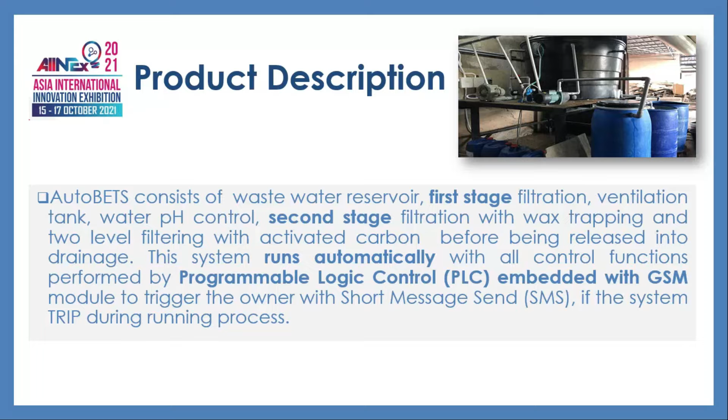Before being released into drainage, this system runs automatically with all control functions performed by the PLC embedded with a GSM module to trigger the owner with SMS if the system trips during the running process. As we can see on the upper right side, that's the overview of the system already installed at Northern Batik.

Okay, the preamble about this product. How did we start? One of the best known textile industries in Malaysia is the batik industry, as we all know. The industry widely expanded when batik was considered a national art form. This is also an important source of employment and locally generated income and revenue.

This industry is usually operated in small scale by workshops and factories throughout the country, especially in Terengganu and Kelantan, without a well-monitored waste disposal system. But in batik creation it is still quite incomplete and unsuitable because of the large amount of waste discharge that causes global warming. Imagine when batik becomes one of the important commodities in Malaysia. Batik was recognized globally, but we fail to take care of our own environment.

Because of that, automation of water treatment plants including in the Batik industry has already been developed and widely used in Malaysia. Majority of them, especially in small and medium scale Batik, are still using the manual automation system, conventional method. Unfortunately, using a manual automation system is time consuming, especially when human supervision is required during a long cycle of treating Batik effluent. Plus, there's the safety of the worker to manage and deal with the acid. This is a safety issue and hazard.

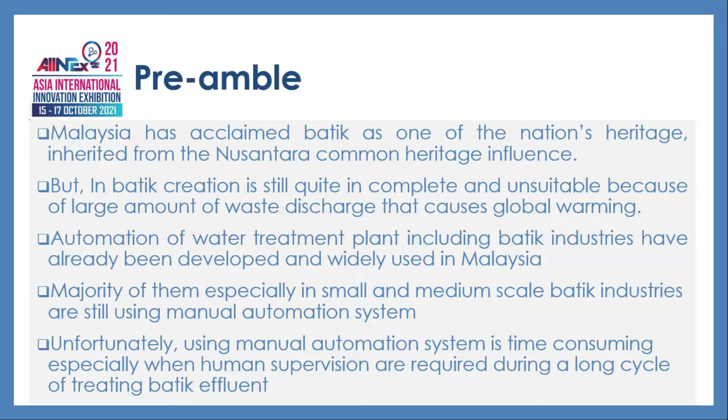Okay, moving on to the problem statement, this is the issue related with this innovation. Today, a large proportion of environmental issues in the Batik industry are related to the use and discharge of water, which includes residual dye stuff, toxicity, color waste, heavy metal contamination, and other environmental issues. This is the first issue, wastewater. Wastewater generates a huge amount of hazardous wastewater.

And the second issue is about the duration. The duration for one cycle of the system to treat the Batik liquid effluent and waste discharge is approximately 4 hours minimum. Apart from that, Kraftangan Malaysia, for example, has produced a system called SREB as treatment for large amounts of waste discharge water in the Batik industry.

But the system operates manually and needs one or more persons in charge to operate it. The duration for one cycle of the system using the manual and conventional method to treat the Batik liquid effluent and wastewater discharge is approximately 4 hours. 4 hours - it's an issue about the duration.

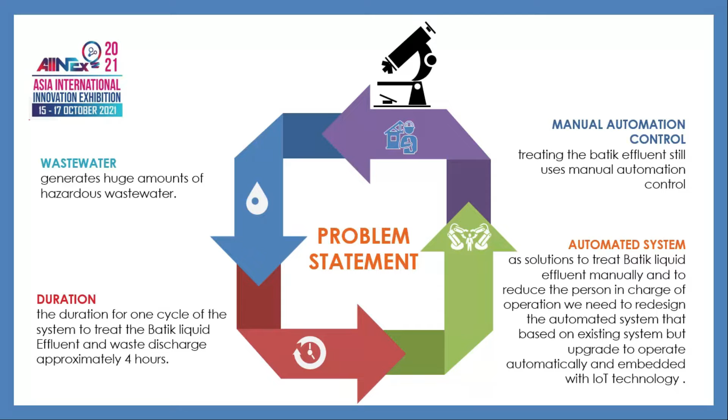As a solution to treat the Batik liquid effluent manually and to reduce the person in charge of the operation, we need to redesign the automated system based on the existing system, but upgraded to operate automatically and embedded with IoT technology currently. This is the main issue that we try to overcome.

You can see the manual automation in Batik effluent treatment system. On the left side, you can see the manual system with one worker. They have 3 tanks and one worker to conduct the process before discharging the effluent to open water. On the other side, you can see the semi-auto with one worker, from the Kraftangan Malaysia Sistem Rawatan Effluen Batik, SREB. But this is still manual, as the worker has to control the control panel to start and stop, and monitor till the end of the process.

So these are the weaknesses, the disadvantages of this SREB.

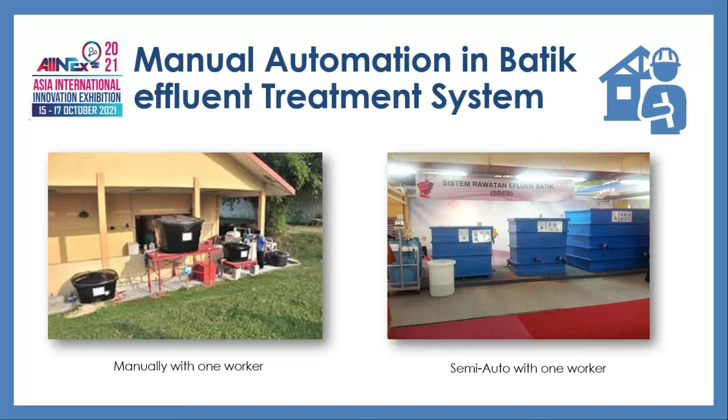This is basically the manual process to treat the effluent of Batik. First, they have the reservoir, where effluent Batik water is stored in the reservoir tank. The second is ventilation, which takes about 2 hours minimum. I will explain why 2 hours later - they have a reason for it. Following that is neutralizing, where we have to titrate using a dosing pump.

If done manually, you have to have one worker put the acid inside the tank and monitor manually using a pH meter. Lastly, you have to use a tank with activated carbon, consisting of one water pump, and then discharge the water to open water.

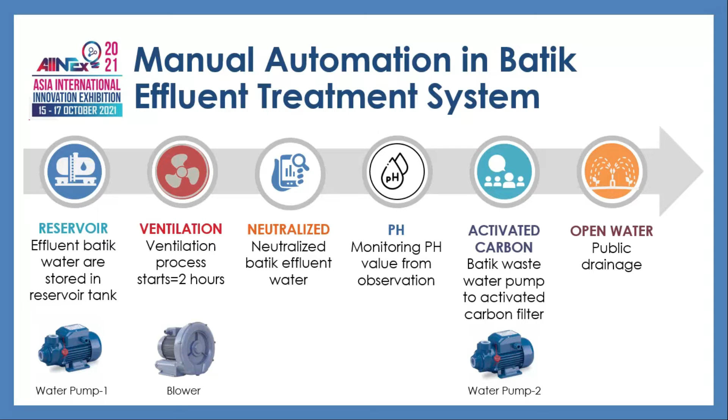In short, I summarize the three key processes for treating Batik: first, the ventilation process; second, neutralizing the effluent solution of Batik; and third, trapping Batik effluent using the active carbon process. These are the 3 main parts of treating the Batik effluent, which also has one water pump.

This is the product functionality. What is it all about? As you can see on the slide, there are numbers from number 1 to number 8. The overall design and process consists of a reservoir tank with sensors.

They also have a ventilation and neutral tank with sensors, and a wax filter with 3-layer filtration. The first layer has sand, stone, and so on, and there is 2-level activated carbon.

To enable the whole Batik effluent automation system, you have to push the start button to turn on the system. Once the system is on, water pump 1 will operate in automatic mode. When the ventilation tank is full, the blower will automatically turn on and water pump 1 will stop automatically, because they have sensors inside the tank.

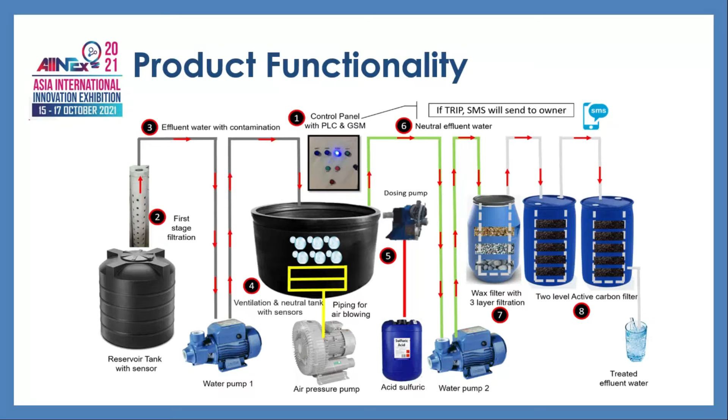When the ventilation tank is full, the blower turns on automatically, and the blower process operates for around 2 hours, in order to lower the level of BOD - biological oxygen demand - and COD - chemical oxygen demand. The main purpose of lowering BOD and COD levels is to ensure the sludge and particles can be decomposed.

Once the BOD and COD reach a lower level, the dosing pump automatically turns on to titrate the sulfuric acid using the dosing pump, until it reaches around pH 6 to 9, referring to DOE 1974. Once the pH value drops to the neutral, permissible level, the water automatically pumps out using pump 2 to the tank containing activated carbon, for filtering the color before it goes to the public drainage. This is the final stage - wax filtering and the level of activated carbon.

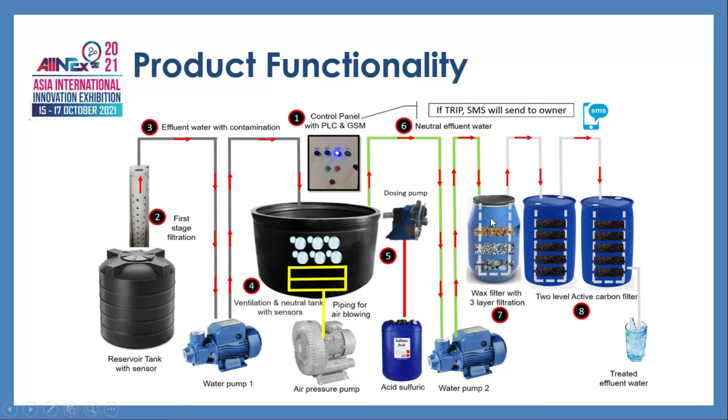This is what the product functionality is all about.

Now let's see the overview of the input and output process. The input consists of the push button, float sensor 1, float sensor 2, pH mini controller, and the pH electrode - this is the input part. The output part has 2 water pumps, 1 blower, and 1 dosing pump. All this process is governed by the PLC function, to process the input and respond to the output.

Apart from that, they have a precaution mechanism - a tripping monitoring mechanism for main power supply trip or failure, designed using a GSM module embedded with an Arduino Uno board, to ensure the user gets immediate information of the failure. You can switch it on and go anywhere, but how do you know the system will be interrupted by a blackout and so on? We try to overcome that issue.

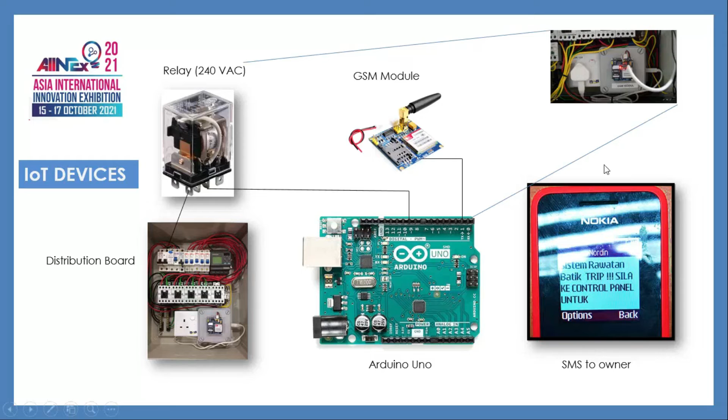Using IoT devices, the GSM module that alerts the trip of the system is placed at the bottom inside the control box. This is the GSM module, let me show you. The red blinking notifies that the system is running.

We can see this is the result analysis - the actual result we share for you, before and after. From the water sample before and after treatment, we sent the water sample to the laboratory to see the reading for pH, COD, and BOD. We can see here the pH value, BOD, and COD, before and after. Based on the result, we can see this is very clear compared to the previous one - before, the pH value was around 11.2.

Based on the laboratory test results, the pH value dropped from 11.2 to 8.4, which is within the range and within the limit.

For the BOD, it dropped from 157.1 to 12. This is very far from the before-treatment value.

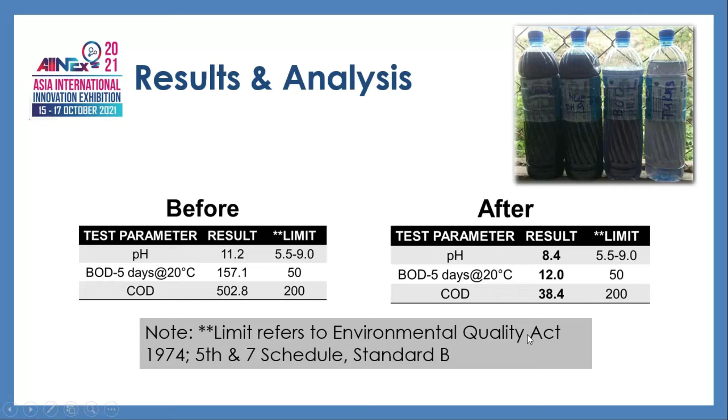And lastly, for the COD, before treatment we got 502.8, and after treatment it dropped to 38.4, within the limit. The limit refers to the Environmental Quality Act 1974, Standard B. This is the result we get from the treatment.

We share with you the comparison between manual automation and automatic automation using PLC, using Autobet. Based on the manual or conventional automation, it is found that the time consumed to treat the Batik effluent is about 4 hours, while using Autobet only takes around 3 hours per cycle. Therefore, it can be concluded that treating Batik effluent using Autobet's automation is faster compared to manual automation.

In terms of power usage, using automatic automation is more cost effective: 306.46 ringgit compared to RM 407.76 per year using manual automation.

In addition, using manual automation requires a worker wages commitment, a total of RM18k to pay salary per year, compared to the automatic system that only requires RM3k for installation of the control panel board.

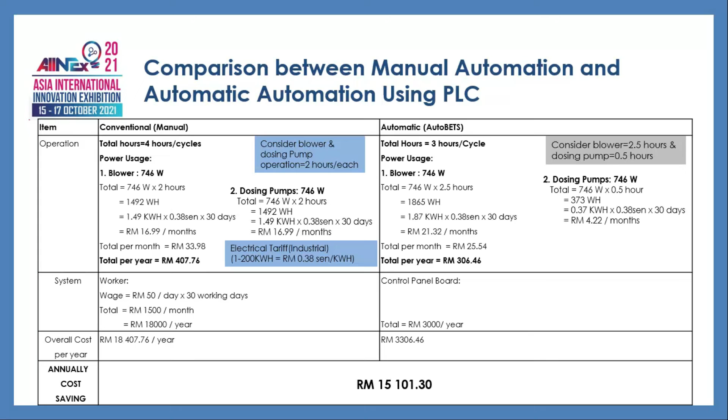Comparing the overall annual cost, we can conclude that the company can save around 15,000 ringgit per year by using automatic automation for the Batik effluent system. This is the significant finding of our innovation.

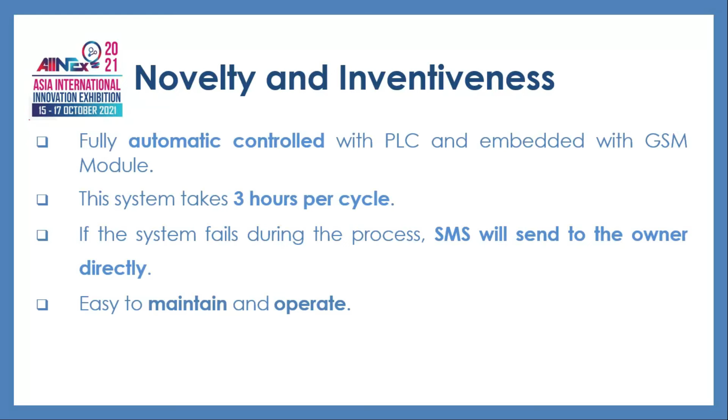When we discuss the novelty and inventiveness, we can conclude that this innovation, fully automatic control by PLC and embedded with a GSM module, the system only takes about 3 hours per cycle. If the system fails during the process, an SMS will be sent to the owner directly, making it easy to maintain and operate. This is the novelty and inventiveness of the innovation.

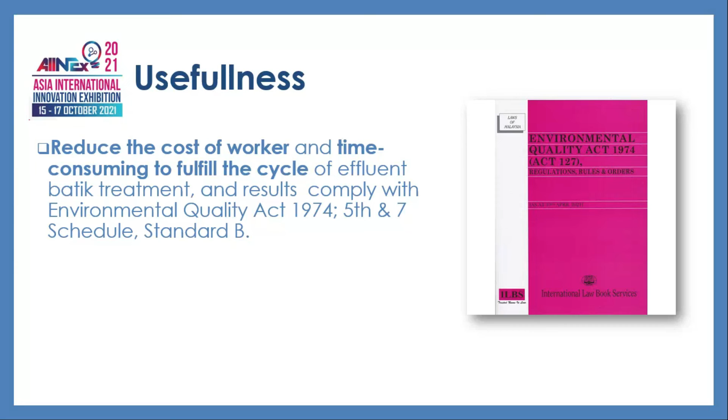When we discuss the usefulness of Autobet, first and foremost we reduce the cost of workers and time needed to complete the cycle, while at the same time complying with the Environmental Quality Act 1974 Standard B. This is the usefulness of the system.

How about the commercialization and market potential? This applies the green Batik concept, a do-it-yourself installation depending on site capability, integrated with basic IoT in conjunction with Industry 4.0. For now, we have managed to register copyright at MyIPO to protect all ideas and documents produced for Autobet.

Overall, Autobet has been able to reduce the effect of environmental pollution by treating Batik effluent before it is released. Additionally, this system has saved costs in terms of human labor use, as well as reduced risk when handling harmful chemicals.

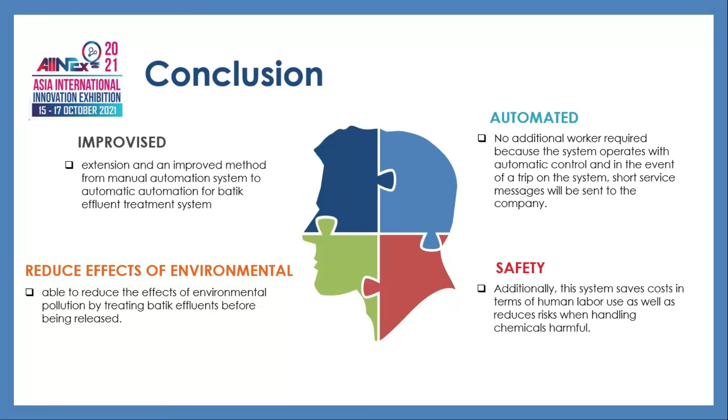That's all from my sharing about Autobet. Ladies and gentlemen, finally we come to the end of the presentation. Hopefully the presentation will be beneficial for everybody.